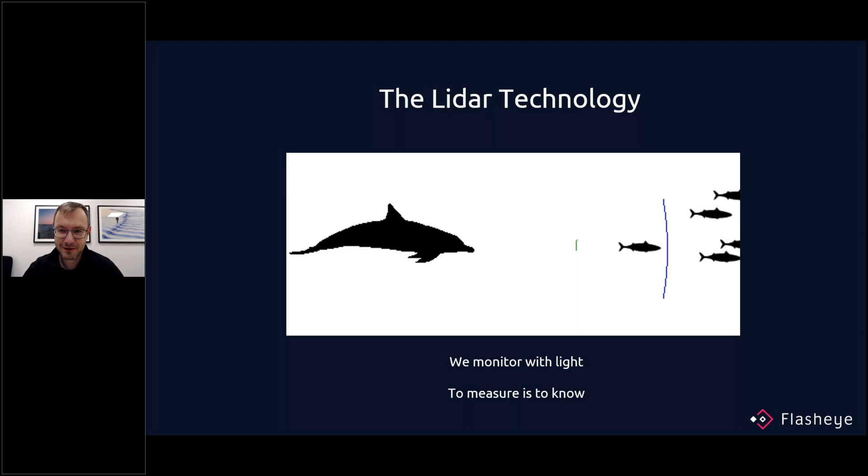A little bit more into the LiDAR technology and LiDAR itself. LiDAR is an acronym for light detection and ranging, and a LiDAR unit, a LiDAR sensor, consists of three major things. First, which is the transmitter, usually an infrared laser diode. Then it is the receiver, which gets the bounced reflection of the light which was emitted before. And the third one is actually a very accurate timer which measures the time between the transmitter transmitting the signal and the receiver getting the reflection back.

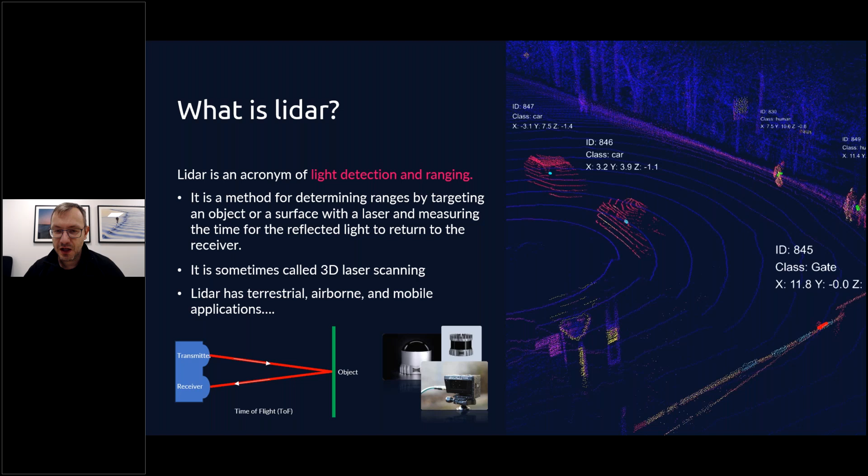Based on knowledge of what the speed of light is in the atmosphere, and knowledge of how much time it takes to get this reflection back, LiDARs calculate the distance to that particular point. Sometimes you will get LiDARs called 3D laser scanning, and applications nowadays are very wide, from terrestrial, airborne, to mobile applications. Some of you might even have a small LiDAR embedded in your phone right now.

A couple of types of LiDAR sensors, starting with the simplest one, which is basically a single beam LiDAR. There is a transmitter and receiver, as you can see on this optics, and it measures the distance to the wall, to the point. This kind of LiDAR is traditionally used in those digital distance meters. If you are working on a construction project or something at home, you might have one already - basically a very accurate meter which gives you the distance between itself and the closest wall.

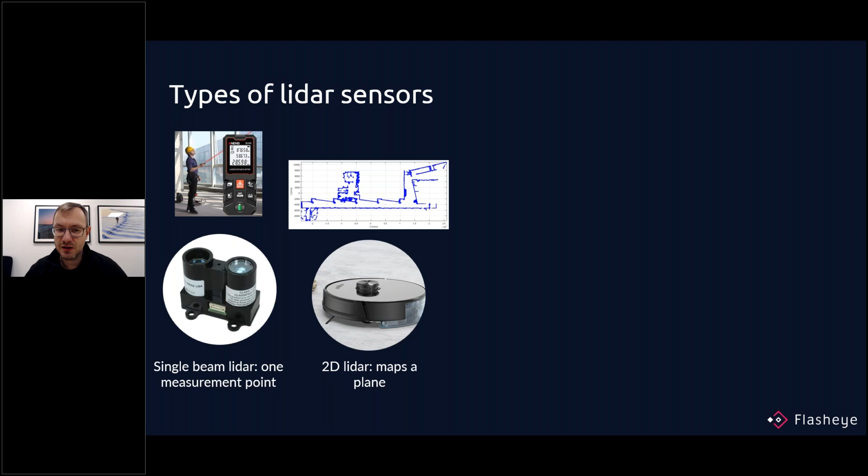Moving up with a more advanced LiDAR, it is a two-dimensional LiDAR, and the difference is that kind of distance meter you had before, you are putting it on a spinning, rotating platform, and then you know exactly at which angle the measurement was taken. Based on that you know the distance to the closest point, and you know the angle where this distance was measured, which means you are getting plane measurements. This one is nowadays quite popular in robotic vacuum cleaners.

Now we're moving to three-dimensional LiDARs, which again is based on previous technology where you have moving parts which are moving very accurately, so you know where the measurement is taken and you are taking measurement of the distance. But in this case, you are doing it with multiple beams, multiple transmitters and receivers at the same time, so you can capture three-dimensional objects, three-dimensional movement, and so on.

You might wonder, is there anything else that can be done? Yes, there is a new technology called 4D LiDAR. This is a new kind of LiDAR based on frequency modulated continuous wave. Until now we had basically LiDARs which were sending the same signal every time and just measuring the time until this signal gets back to the LiDAR.

With frequency modulated LiDARs, the wave of the light is continuously changing, and the LiDAR does a lot of analysis of this waveform which is getting back to it. Based on that, based on the Doppler effect and so on, you can get a fourth dimension, which in this case is instant velocity, basically per point.

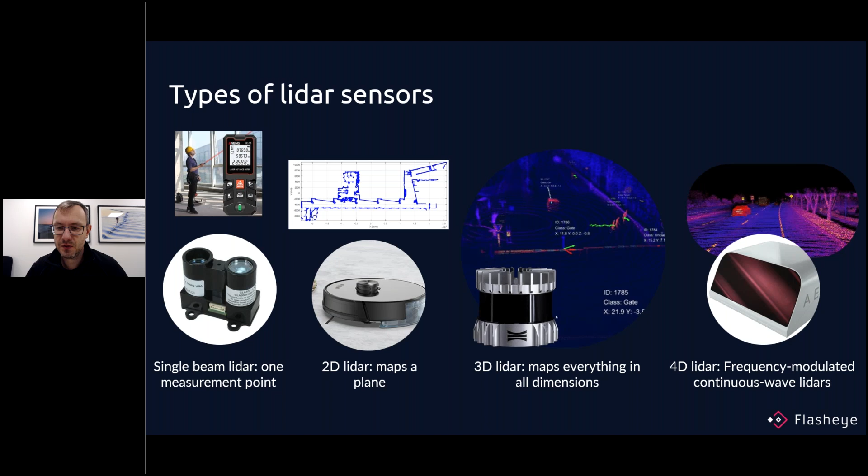So you can get directly out of the sensor velocities of the objects around you, and a couple of other features like even better range, because the signal received by the LiDAR does not need to be that strong compared to traditional time of flight LiDARs. It might be a much weaker return, but since it is frequency modulated, the algorithms will understand that was a beam, a wave which was sent much time before, and you can get much better and more accurate readings.

A couple of crucial parameters for LiDARs which we are always talking about, and this is also good to understand when thinking about applications: different kinds of field of view, as you could notice on the pictures with different LiDARs. What is the difference?

What I want to talk about now is the difference between horizontal and vertical field of view. In horizontal, you have basically two options: either LiDARs which are spinning internally and giving you 360 degrees field of view in the horizontal plane, or non-rotating sensors which give you a fixed field of view. Basically, you can think about it like a camera—you have some limited field of view, and based on the structure itself, you will have different horizontal and vertical, either wider or narrower, and so on.

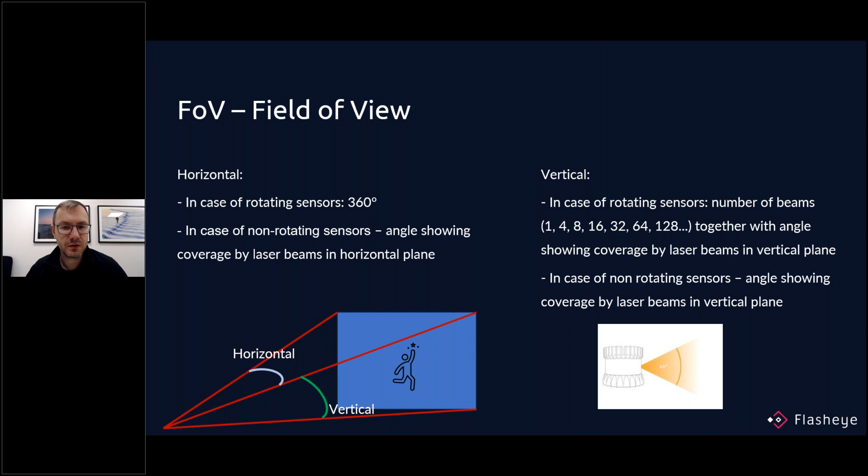Vertical, in case of rotating sensors, will be mainly limited by design and by the number of beams inside the LiDAR, so you can have different configurations: 4, 8, 16, 128 is most commonly used for higher resolution with pretty good vertical coverage. With non-rotating sensors, as I said before, it is very sensor specific, based on the technology the sensor is using, optics, and so on. But those are the two main differences.

Number of channels and resolution are other parameters which are extremely important in the LiDAR world. In rotating sensors, resolution is based on the vertical field of view and number of channels. For example, if you have a sensor with 16 channels—sometimes I use channels or beams, basically 16 lasers inside—

and a vertical field of view of, for example, 45 degrees, it will be a fairly low resolution sensor. But when you have the same field of view with 128 beams, it will give you much more information and much higher resolution. So with a higher number of beams you get higher resolution, or with lower vertical field of view you can also get higher resolution, but only over a limited vertical field of view.

On rotating sensors, you might have different configurations of your beams: uniform, which is basically uniform distribution along the angle; gradient, which is typically used in automotive LiDARs and gives you much denser information in the middle of the field of view. And two which are more scenario specific: below and above horizon, which give you half of the vertical field of view compared to uniform. The beams will still be distributed equally within this below or above horizon field of view, but distributed, as the name indicates, either below horizon or above horizon from the LiDAR's perspective.

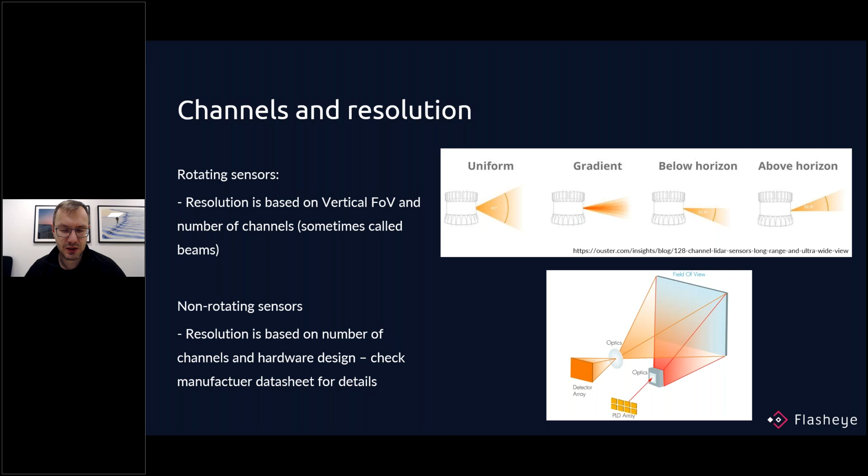In non-rotating sensors, the number of channels and resolution depends on how the sensor is designed, what the field of view is, and what kind of technology the sensor uses. So it will be very sensor specific, and for details I would advise checking the documentation for the sensor.

Now, making LiDAR even better with advanced 3D perception software. So the question is, LiDARs are great hardware, but can you make it even better? And the answer is, of course.

First, using advanced self-diagnostics to detect if the sensor itself, the hardware itself, is dirty, if someone covered the sensor, and also to get statistics and information about sensor health. Then another part of the software that might advance the usage of LiDAR is understanding of the whole scene: what is happening around, what is the static environment, and what is a dynamic object within that static environment. This can be done in LiDAR processing software, or as we like to say, LiDAR perception software.

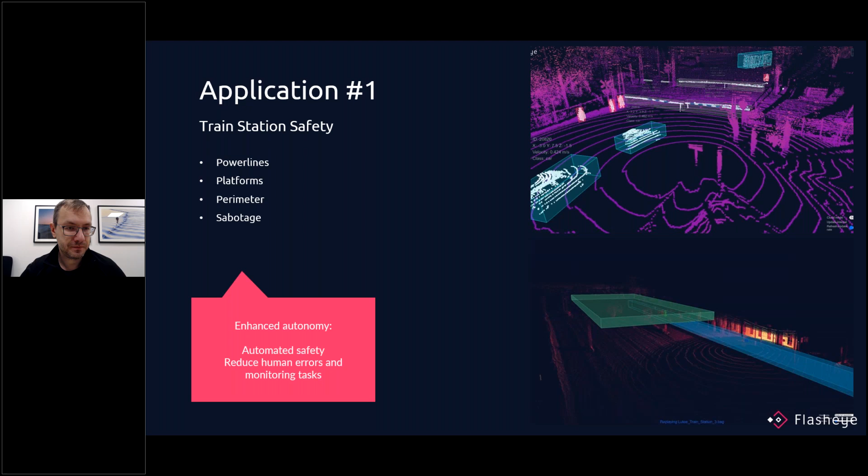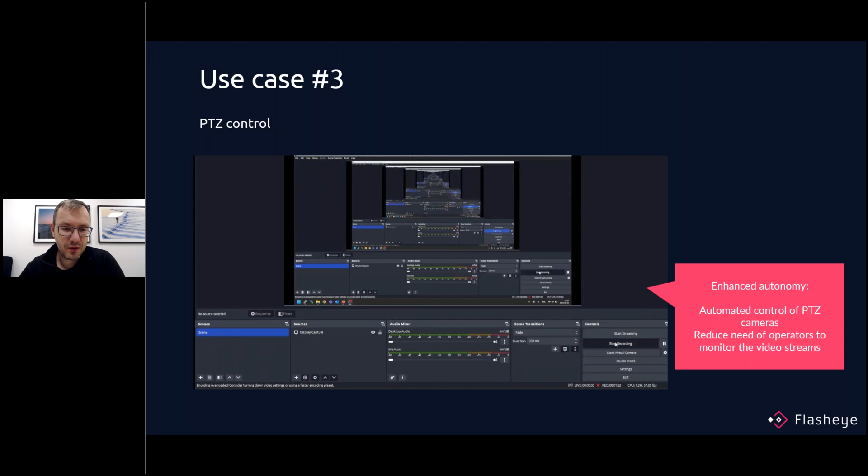You can think of a camera which will navigate through the space on its own, but you cannot trust this kind of scenario, because if you program a PTZ camera to follow a specific routine, it will happen over and over, same routine, same movements, and someone observing the area might notice and learn the timing to go around.

When we use the LiDAR, no matter where the camera is pointing, LiDAR detects 360 degrees and can navigate the camera. Consider another scenario where multiple intruders come from different places: LiDAR will pick them all in its field of view, then navigate the camera from one to another, so you get visual confirmation of what is happening in the space.

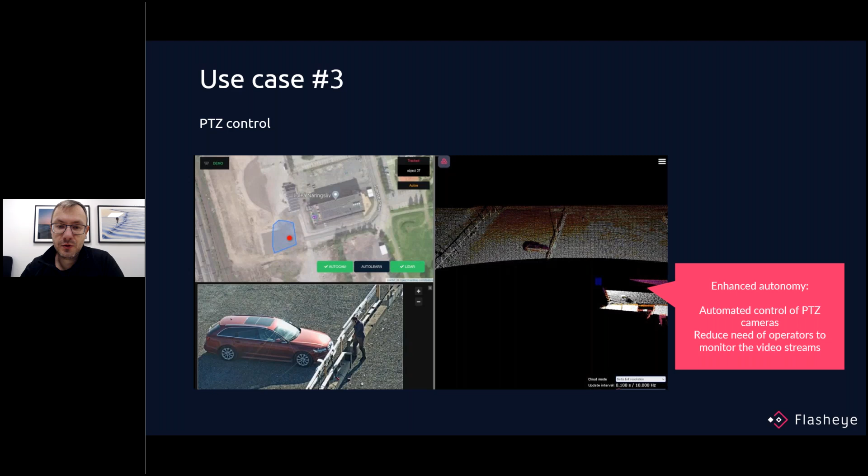Enhanced autonomy: automated control of the PTZ cameras, and of course reduced need of operators to monitor video streams and control the cameras manually.

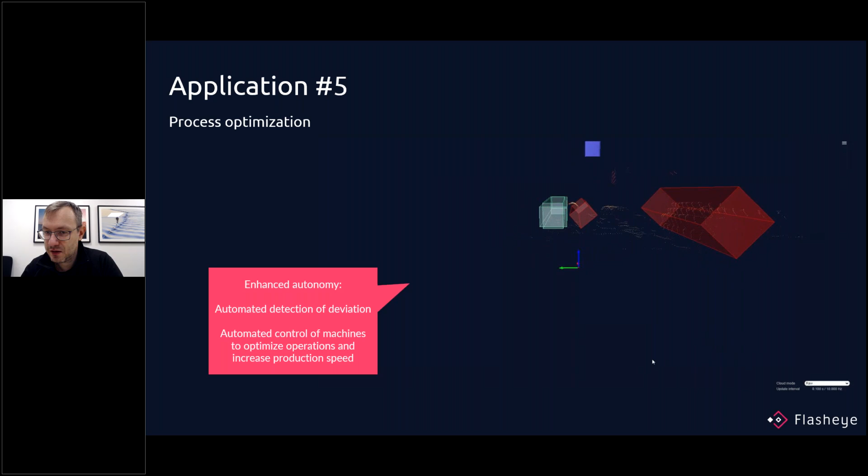Before, we would have had to install many different sensors covering all possible scenarios. Right now, you have it covered with only one sensor and a little bit of intelligence in the software.

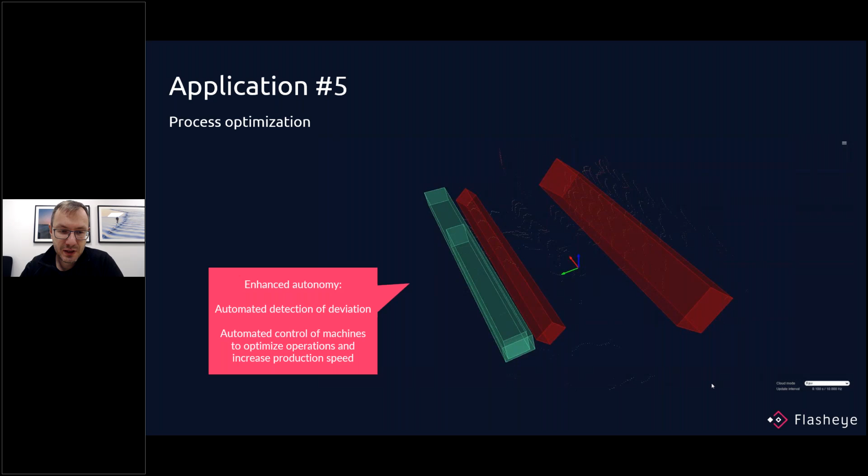Enhanced autonomy in this case is automated detection of the deviation and automated control of machines to optimize operations and increase production speed.

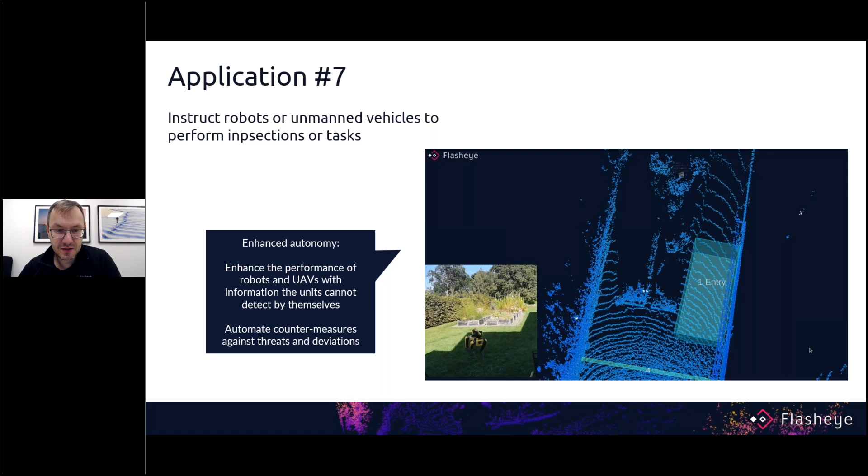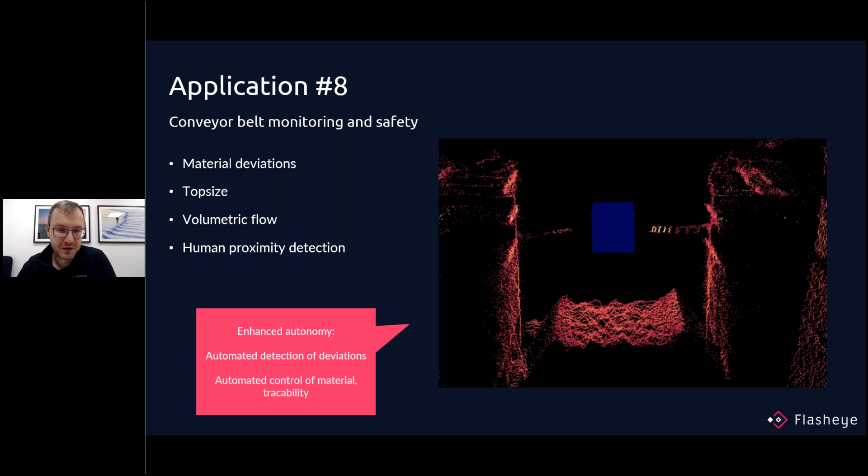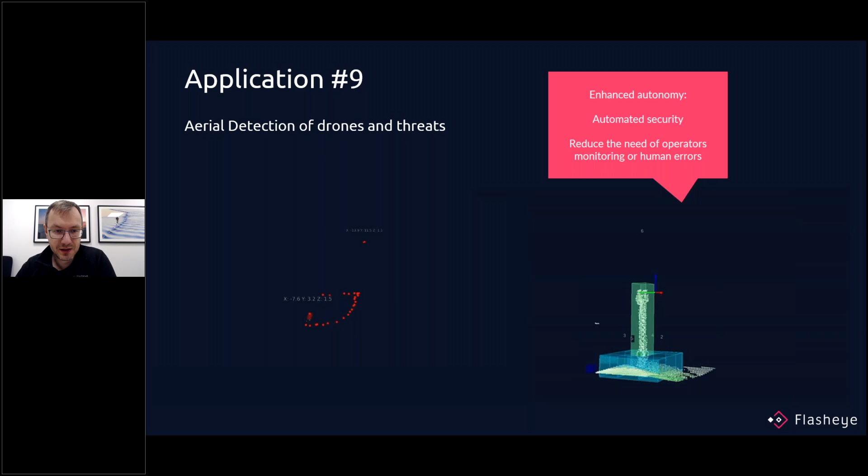With LiDAR systems, you can detect drones and know exactly where they are, and take preventive action. This isn't only useful at airports—basically any critical infrastructure, such as communication radio towers or water dams, can use this kind of installation to detect such activities and report accordingly.

Moving on to our last application for today, number 10. We call it internally in Flasheye this application load finder, but what it actually is, is data from the Lidar aggregated and built up together.

As you can see on the left side of the screen, a dump truck driving underneath the Lidar, and the Lidar software making a three-dimensional model of the truck. At the same time, we have a model of the same truck when it was driving in the opposite direction when it was empty. And with proper calculations, you can get directly the volume which is loaded on the truck.

In this particular case, it is in a mining environment. So the truck is driving inside the tunnel into the mine empty, outside from the mine filled with material, and on the way, without slowing down, without stopping for measuring the weight, without any extremely expensive and difficult infrastructure, you can get volume measurement basically on the fly as it goes.

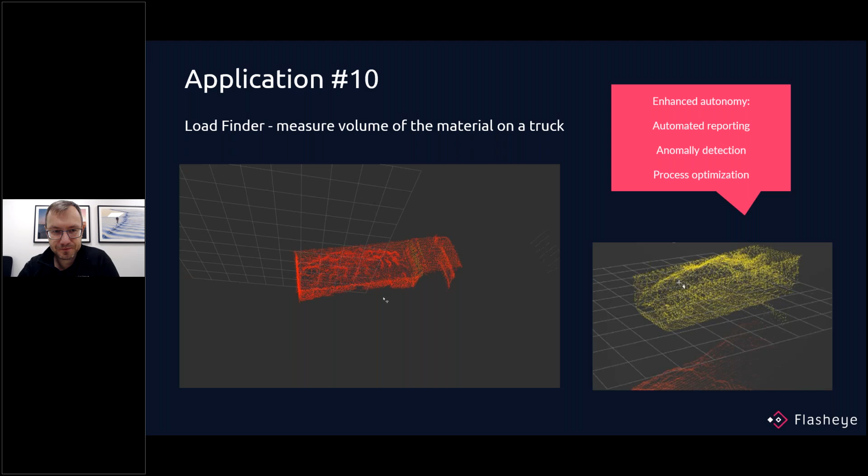Summarizing a little bit, you can think about Lidar perception as a building block software where you can pick up different puzzle pieces from the software and use them for your own application. The applications I mentioned were just typical examples, a couple of applications we are working with, but much more is possible.

I used to say imagination is the limit, but of course you have to consider that the Lidar provides you extremely accurate, extremely precise data, which can be used in different situations.

You can create different three-dimensional zones, you can get three-dimensional tracking, you have all those good things like classification, 3D model build-up, volume measurements, PTZ camera control. So whenever you have some application in your mind, it possibly can be covered right away with our perception software.

There are a couple of key takeaways I would like you to take from this webinar today. First, you can start your Lidar journey already today. Our software supports a lot of the applications I mentioned, and we can create new applications on the fly by using already existing blocks.